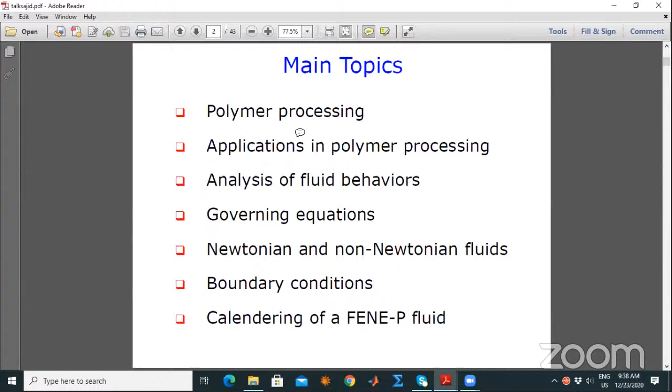First of all, polymer processing is defined as the engineering activity concerned with operations carried out on polymeric materials or systems to increase their utility. Industries associated with polymeric materials are either concerned with production of polymers from raw material, or with physical conversion of polymeric material into a finished product.

Mathematical modeling plays a central role in the process development and design of such processes. There are several important polymer processing operations, such as wire coating, calendering, roll coating, spin coating, knife coating, die forming, and mold coating. So there are multiple procedures.

To explain to the audience, particularly the research students, I will briefly explain a hypothetical model of the different processes in the polymer industry - how one can make a sheet of the desired thickness, or formulate a plastic film, or coat a sheet.

Let us consider a flow sheet of a hypothetical process for making a plastic film. The first step is dissolution: the polymer in solid form is mixed with a solvent to form a liquid, and that liquid is then transported from one place to another through the process of pumping.

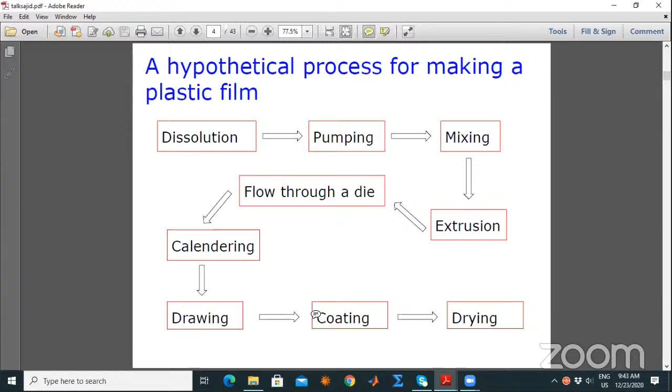On the basis of temperature variations, one can dry the film that is produced over a substrate. Not all these processes get into the mathematical model, because these processes are involved in the industry. But for mathematical modeling, we usually use the process of calendering, and we use mathematical models to describe the process of coating. So there are two main processes related to mathematical models, and those are calendering and coating. I will be briefly explaining a few of them in the coming slides.

This mechanism is commonly used in the paper, plastic, rubber, and steel industries.

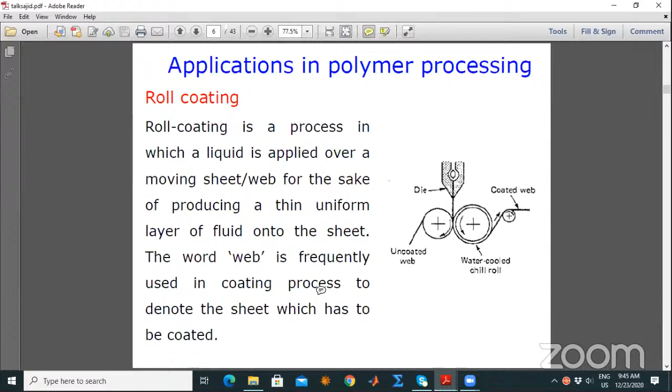Then there is another process known as roll coating. Roll coating is a process in which a liquid is applied over a moving sheet or web to produce a thin, uniform layer of fluid onto the sheet. For example, you can see from this figure, this is an uncoated web, and this is the polymer solution that is coming, and we need to coat this sheet with this liquid. This is the second roll, which also plays a cooling or heating role, so that the liquid is coated onto the web, and the coated web is collected on this side. The word web is frequently used in coating processes to denote the sheet which has to be coated.

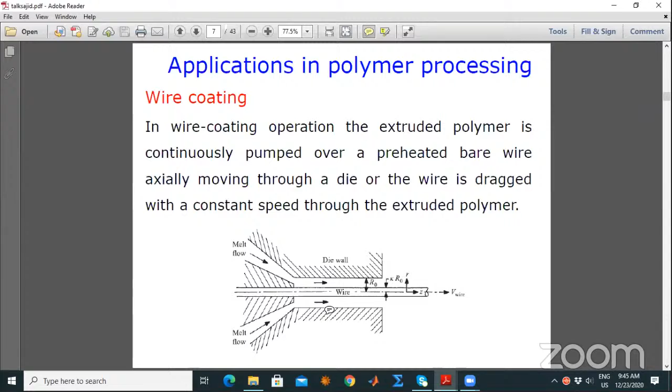Now, many of these explained steps refer to transport phenomena, the processes of momentum, heat, and mass transfer. Fluid dynamics is basically associated with momentum transfer, so this forces us to look at fluid flow models for such situations. As I've already explained, there are two main situations, the process of calendering and the process of coating, that are used to mathematically model through fluid mechanics equations. So any model in fluid mechanics can be based on the physical laws of conservation of mass, conservation of linear momentum, conservation of angular momentum, the first law of thermodynamics, and the second law of thermodynamics.

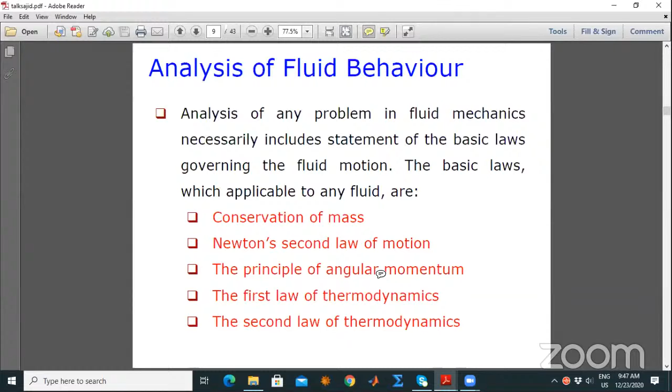Only these first two basic laws are necessary for a minimum level of study of any fluid problem: the conservation of mass and the conservation of momentum. If there are rotations involved in the system, then we need to add the angular momentum terms, and if there is heat transfer involved, then we need to also incorporate the first and second laws of thermodynamics. It is not necessary to use all these laws together, but there are some situations where we also need the additional features.

For example, if you have a situation in which the fluid is moving through a magnetic field, then we need to incorporate the Lorentz force into the momentum equation. And if the fluid is moving through a porous medium, then we have to incorporate the Darcy resistance. So there are additional features coming into the equations if we have additional restrictions on the problem.

Once we have developed a mathematical model in the form of partial differential equations, a question arises of how to simplify or solve this model. Many apparently simple problems in fluid mechanics cannot be solved analytically, and in such situations we must resort to more complicated numerical solutions and results of experimental tests.

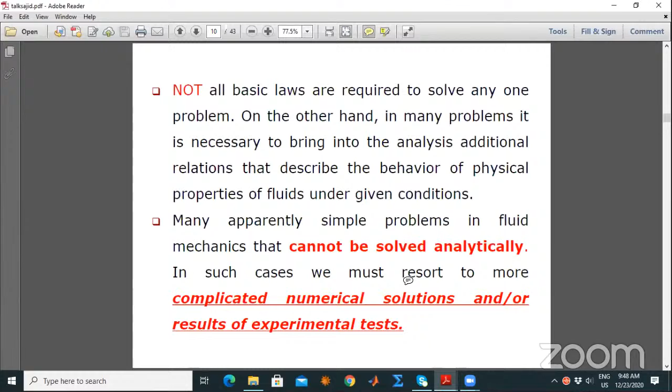To describe any fluid model, we need to have a constitutive relationship that relates the shear stress with the deformation rate for that particular fluid, or one near to it, which can predict the properties of that fluid. So we need to define which kind of constitutive relationship we are going to use to study our fluid model. The subject that deals with such situations is known as rheology, the study of relationships between stress and corresponding strain in a non-rigid substance.

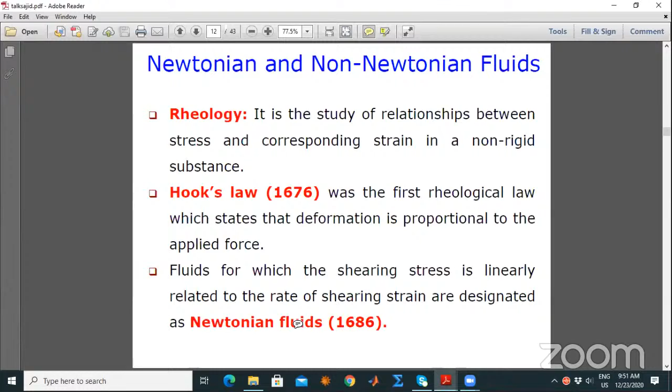The first rheological law was given by Hooke in 1676, stating that the deformation is proportional to the applied force, for solids. For fluids, the first such law was given by Newton: fluids for which the shearing stress is linearly related to the rate of shearing strain are designated as Newtonian fluids, and this model was given by Newton in 1686. Most common fluids such as water, air, and gasoline are Newtonian under normal conditions.

Maxwell in 1867 suggested that all substances, including gases, should possess both viscosity and elasticity in shear, and he quoted the example of glue. The glue exhibited a time-delayed partial recovery of deformation, and this was the first recorded observation of non-Newtonian behavior that deviates from Newton's law of viscosity.

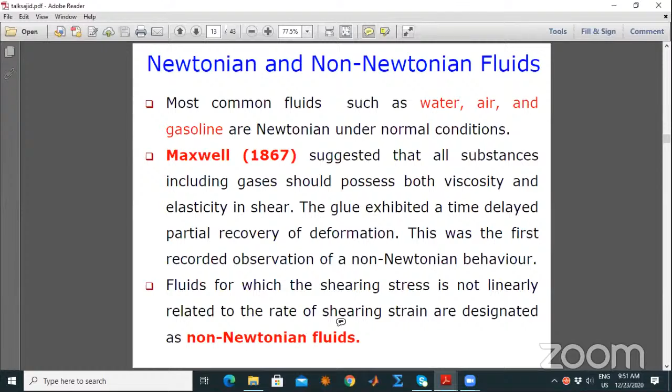Fluids for which the shearing stress is not linearly related to the rate of shearing strain are designated as non-Newtonian fluids. In the late 1920s, it became realized that there exist large variations in non-Newtonian behavior, and therefore one cannot describe all non-Newtonian liquids by a single constitutive relationship, because of the complex nature of such fluids.

So there exists a rheological classification. One can define different classes of such non-Newtonian fluids: the time-independent fluids, the thixotropic fluids, linear viscoelastic fluids, and non-linear viscoelastic fluids. These classifications exist for the non-Newtonian fluids.

I will briefly explain the time-independent fluids, which are further divided into three categories: the pseudoplastic, famously known as shear thinning fluids; the dilatant, or shear thickening fluids; and the viscoplastic fluids. Shear thinning means that when we increase the rate of shear, the viscosity decreases, and the opposite behavior is shear thickening, where increasing the shear increases the viscosity.

Viscoplastic is the behavior of the fluid in which the fluid needs a minimum amount of stress to be moved, which is known as the yield stress. For example, toothpaste and similar fluids fall in the category of viscoplastic fluids.

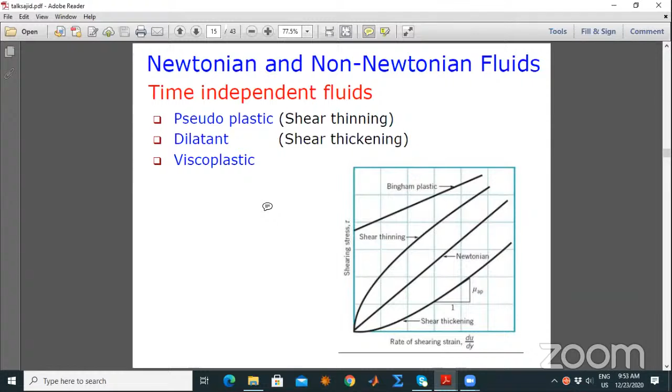Thixotropic fluids are those fluids whose present sheared internal structure is undergoing change for any reason. For example, gel that becomes thin on shearing, and viscosity decreases with time.

The opposite type of behavior, namely a build-up of structure under steady shearing motion, is known as rheopexy or anti-thixotropy. In this case, structure builds up and viscosity increases with time, and fluids even solidify in some cases.

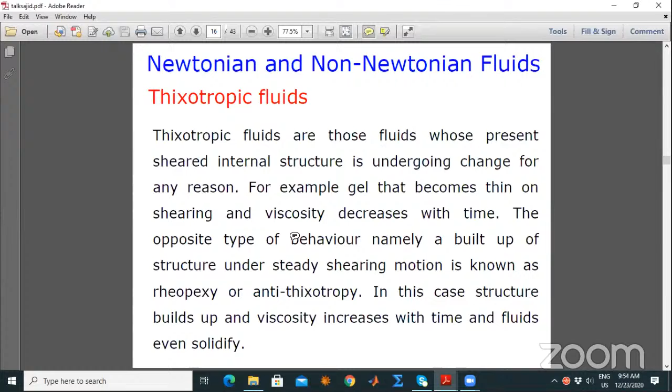The other very important class of non-Newtonian fluids is known as viscoelastic fluids, and there are two models related to viscoelastic fluids: the linear model and the non-linear model. This is a type which possesses both appreciable elasticity of shape and also viscous properties.

In oscillatory shearing motion, elasticity produces a lag between the shear rate and stress. This phenomenon occurs when the applied shear stress is small or slow.

For the nonlinear case, if the shear is large enough, then the strong elastic liquids show normal stress effects, and the normal stresses on the face of an elemental cube are no longer equal. So in different directions, the normal stress effects are different.

Another important class of non-Newtonian fluids is the generalized Newtonian fluid, which is based on experimental data. People have predicted some fluid models on the basis of empirical results based on experimental data.

In such cases, the important phenomenon in the generalized Newtonian fluid is that the shear stress is a function of shear rate at a particular time, but not dependent upon the history of the deformation, meaning the previous state of deformation does not affect the present state of deformation.

The constitutive equation for such fluids is the generalized form of the Newtonian fluid. The power law and the Carreau cross fluid are examples of such fluids.

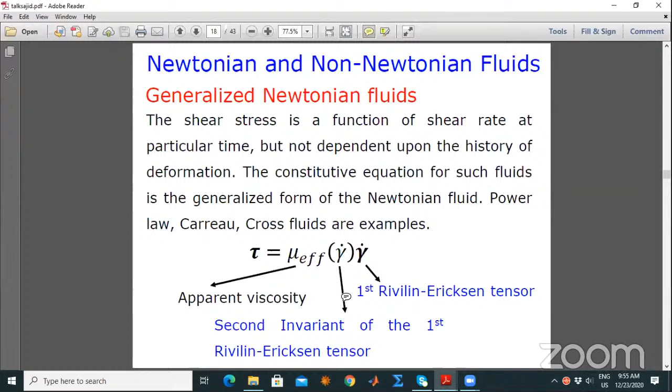The other class is the differential type fluids. As already mentioned, in the generalized Newtonian case the current state of deformation does not depend on the history of deformation, but in the differential type fluid, the current state of deformation depends on the history of the deformation.

So for a short part, the recent memory is very important in such fluids. More specifically, stress is a function of the velocity gradient and some number of its higher derivatives. These materials lack a gradually fading memory.

Instead, their memory fades precipitously, meaning it fades suddenly. Further, they do not exhibit stress relaxation in a creeping flow. Second grade, third grade, and fourth grade fluid models are examples of differential type fluids.

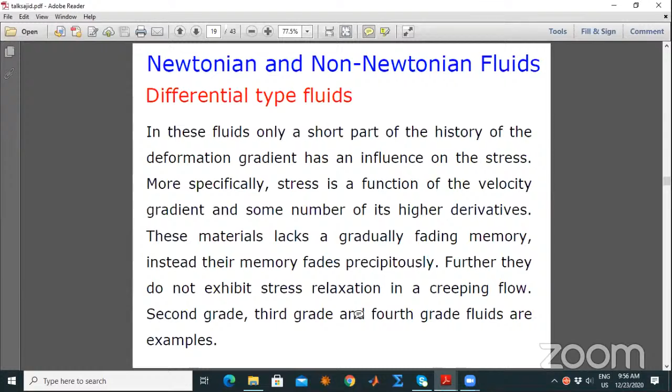Another important class of non-Newtonian fluids is the rate type fluids. This is because of Maxwell, who put forward a mathematical model in 1867 that describes the elastic and viscous behavior of gases. He recognized the notion of stress relaxation and introduced the concept of relaxation time.

Oldroyd was first to develop the rheological framework for rate type fluids. The important thing is that in differential type fluids, stress is explicitly given in terms of velocity gradients and its higher derivatives. However, in rate type fluids, this relation is implicit, and sometimes it is difficult.

We need not only to solve the fundamental equations, but also to solve the partial differential equations that describe the constitutive relationship. Once we have the fundamental equation and the constitutive relationship in hand, then we need to impose the physical boundary conditions based on the interaction of the fluid either with the solid interface or with the fluid interface.

So when dealing with the fluid-solid interface, we have to incorporate in some cases the no-slip boundary condition, the slip boundary condition, or the generalized slip boundary condition. I'm not going into the detail of these boundary conditions.

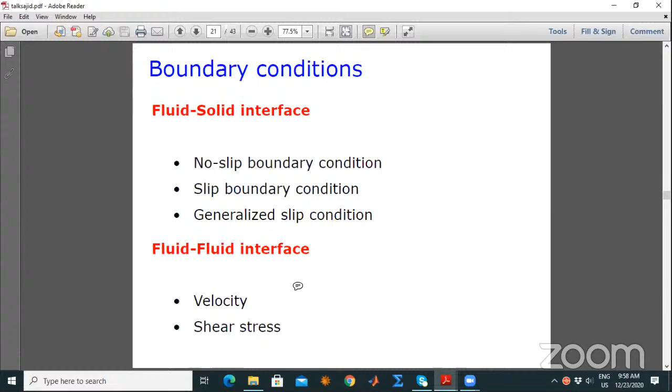And if we are dealing with the fluid interface, we need to stress the continuity of the velocity and the shear stress at the fluid interface. Now, coming to the particular example of the process of calendering of a FENE-P fluid, first I will describe the fundamental equations that are necessary for solving this.

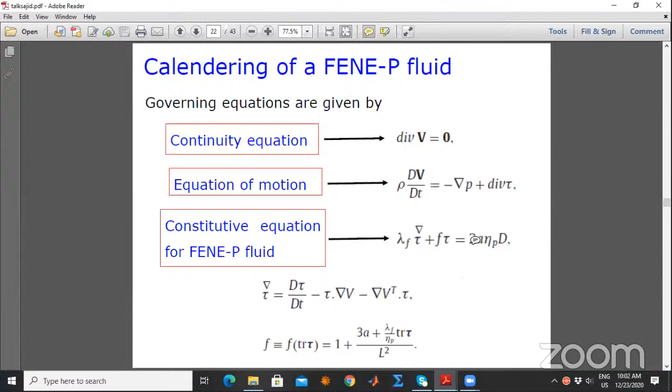So now you can see that this is an implicit relation, and we need to solve these. There are two unknowns u and v, and a third unknown which is the pressure P. Then there are three unknowns tau xx, tau xy, and tau yy. So there are 6 unknowns and 6 partial differential equations to solve. This is a difficult system to be solved in its present form.

So we utilize the condition that the gap between the two rolls is much smaller than the radius of the roll. By incorporating this condition, which is a physical condition in this case, famously known as the lubrication approximation theory in fluid mechanics.

We assume a creeping flow, because in such situations where the polymer is moving, the flow moves very slowly, and in such cases the inertial part can be neglected. So we have neglected the inertial part, and we further assume that v is much less than u, and that partial derivatives in the direction of x are much smaller than the partial derivatives in the direction of y. These are all assumptions of the lubrication theory.

Once we utilize these assumptions into these equations, they considerably simplify for us, and we get that the pressure is not a function of y in this case. We can now easily solve this equation by integrating it, and we can determine the tau xy component from here.

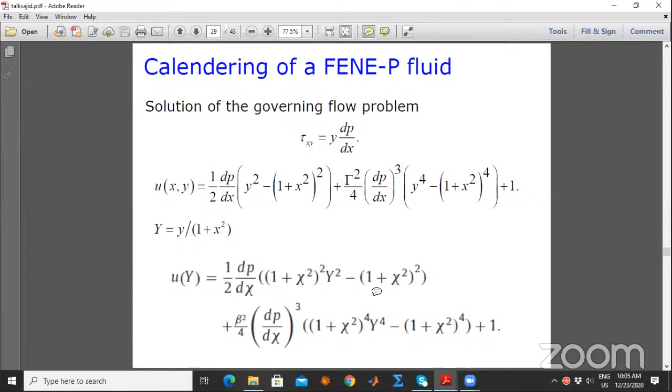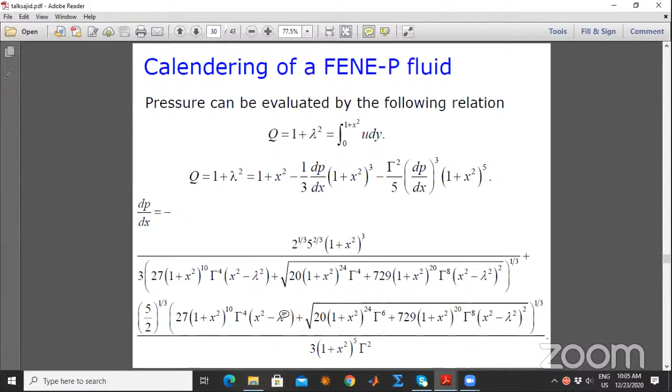On the basis of this velocity, because in these situations pressure is not known to us, but the flow rate of the situation is given to us, that the fluid is moving with this rate. So by utilizing the formula for the flow rate, because this flow rate is known to us, we can find the flow rate and we can find the pressure gradient from here. And by integrating this pressure gradient, we can find out the value of the pressure.

We can find out the quantities of engineering interest, like the roll separating force, that is, when the fluid is leaving the rolls, what is the force on it. Then we can also find out the power transmitted on the roll. We can also find out the shear viscosity, and we can also find out the first normal stress coefficient. So these are the expressions for finding these values.

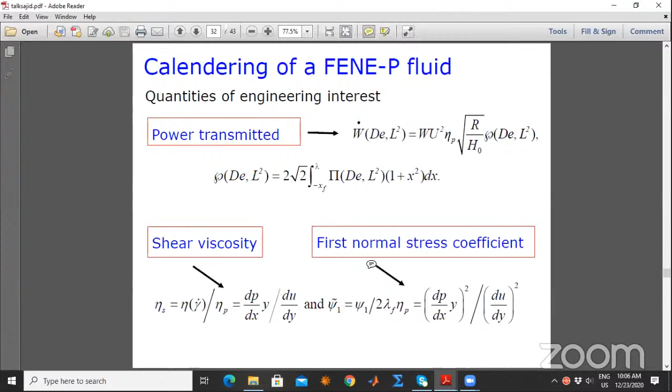And we have some key findings related to this study. I have not explained in detail the mathematics, because it's somehow a complicated model and you need to solve it. The key findings of the present study are basically that the pressure inside the calender decreases by increasing the viscoelasticity of the fluid. Then the thickness of the exiting sheet is less for viscoelastic fluids up to a specific value of entering sheet thickness, and then it increases.

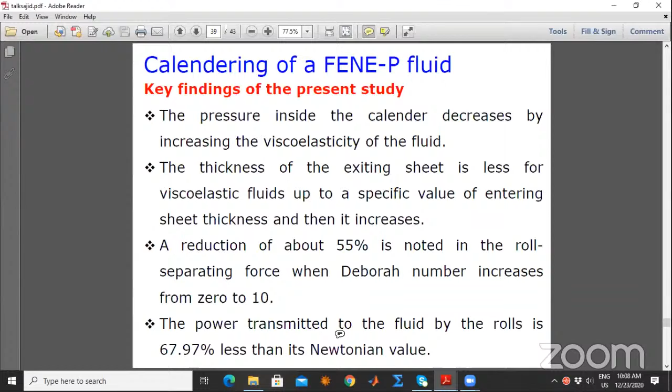Because we are comparing our results with the theoretical model of the Newtonian fluid that already exists in the book of Stanley Middleman on the fundamentals of polymer processing, we observed that a reduction of about 55% is noted in the roll separating force when the Deborah number increases from 0 to 10, and the power transmitted to the fluid by the rolls is roughly 68% less than its Newtonian value. And these results are already published in the Journal of Non-Newtonian Fluid Mechanics.

And if someone is interested in the details of the calculation, one can also go through this research publication. And we are hopeful that the solution presented here provides a solid benchmark for the computational modeling of the more sophisticated two-dimensional calendering problems.

I also like to explain that I was associated as adjunct faculty in NUST as well, in 2016, and I supervised two MPhil students. One of them worked on such kind of problem, and we investigated a flow problem of some authors from Sweden, and we pointed out some corrections in their model.

We pointed out corrections in their model to the authors, and they corrected it, and they acknowledged the efforts of this, and they also acknowledged the School of Natural Sciences, National University of Sciences and Technology, because the student Hira Siddiq was an MPhil student over there in the department. I was supervising her case, and she also published a paper with the School of Natural Sciences address in another fluid model.

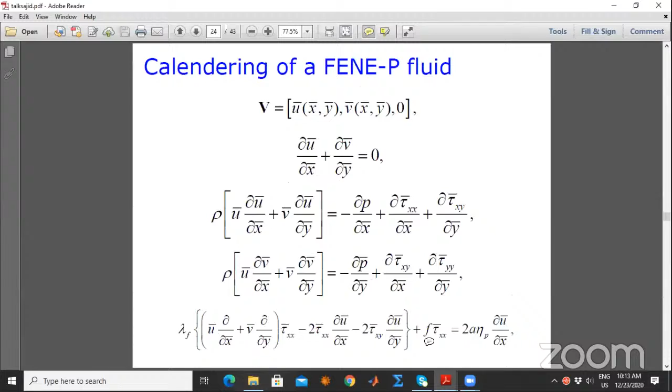Okay sir, one quick question related to my previous question. If you can please show us page 23 of your PDF. Okay, fine. Yes, please.

And looking at the boundary conditions on page 27, if you can go please. So, yeah, we have U is equal to capital U, U bar is equal to capital U at Y equals H of X bar. So I was wondering that one should have this radius multiplied with capital U, in case we are saying it is the angular velocity. If it is tangential velocity, it is okay.

So basically the answer lies in the previous discussion as well, because the mathematical model is for the narrow gap, and in that situation the curvature is negligible, so one can utilize the capital U velocity as compared with U. But your point is very valid, and I will look into the possibility of putting R into the mathematical model and see what effects appear, because I have not yet seen it. I will take your point very seriously, and we can develop a mathematical model incorporating the radius R into the equation, and then I can say something about whether we get a different scenario or similar results to what we have already got.

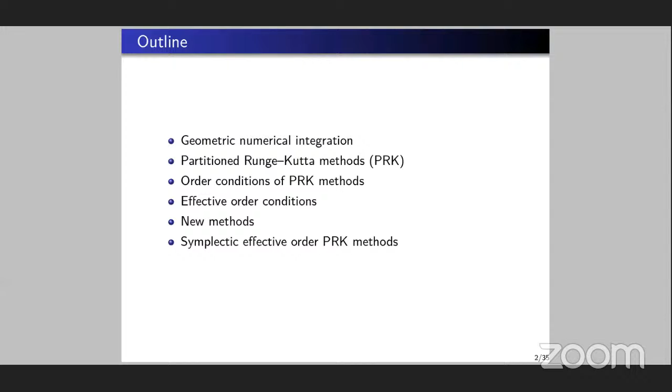Geometric numerical integration is a branch of numerical analysis concerned with the preservation of geometric and physical properties of a differential equation after discretization. By this I mean, if you have a differential equation with certain conserved quantities, we want these conserved quantities to be preserved numerically as well. That means conservation of energy, conservation of momentum, are preserved analytically, but we want to make sure that our numerical method preserves the energy, momentum, phase space, or symmetry of the differential equation numerically as well. This branch is known as geometric numerical integration.

So for the Hamiltonian system, we have symplectic methods. For reversible systems, we have symmetric methods. For differential equations on manifolds, we have Lie group integrators. And for integral preserving equations, we have the discrete gradient method.

What are conservative differential equations? Well, the concept is the first integral. So if we are given a differential equation y' = f(y), then a function h(y) is the first integral if it satisfies the equation such that the gradient of h multiplied by the right hand side of the differential equation yields a zero answer.

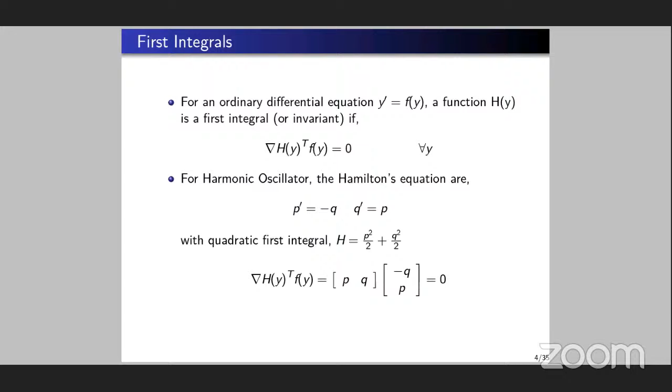What is our aim? Our aim is to numerically solve this differential equation with initial condition, and we will obtain discrete solutions. Obviously, it's a discretization, so we will not get the continuous solution - we will get discrete solutions y0, y1, y2, y3, up to yn, whatever n is. We want to make sure our energy remains constant, meaning h evaluated at the initial point equals h evaluated at all points, so the error between them should be 0. That means the energy is conserved numerically as well.

For this purpose, in this talk I will talk about symplectic Runge-Kutta methods, because they approximately preserve the quadratic first integrals of Hamiltonian systems.

What we are trying to do is construct symplectic Runge-Kutta methods from the definition, apply these methods on the Hamiltonian system, verify their order, and then verify the conservation of energy as well.

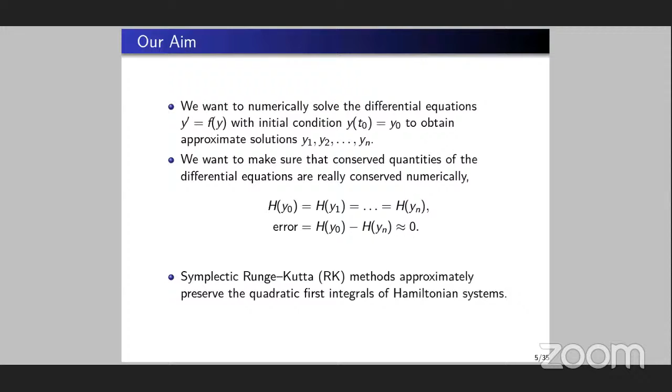We are interested in a separable Hamiltonian system, and this is the equation of a separable Hamiltonian system. This work can be extended to non-separable Hamiltonian systems as well. The equation is separable in the sense that P dash depends only on Q on the right hand side, and Q dash depends only on P.

What we are trying to do is solve this separable system using partitioned Runge-Kutta methods. By partition Runge-Kutta methods, I mean I will solve one differential equation, P dash, using one Runge-Kutta method, given as the stages and the output value. Capital Pi are the stages, and Pn plus 1 and Pn are the input-output values of this Runge-Kutta method, which solves the differential equation P dash equals f of Q.

The second differential equation is Q dash equals G of P. This is the separable second differential equation, and we solve it using another Runge-Kutta method, with stages Qi and output value Qn plus 1 with input value Qn. We have the matrix Aij - this is the Runge-Kutta method for one, and the Bi are the quadrature weights for this method, while A tilde and B tilde are the parameters for the other Runge-Kutta method.

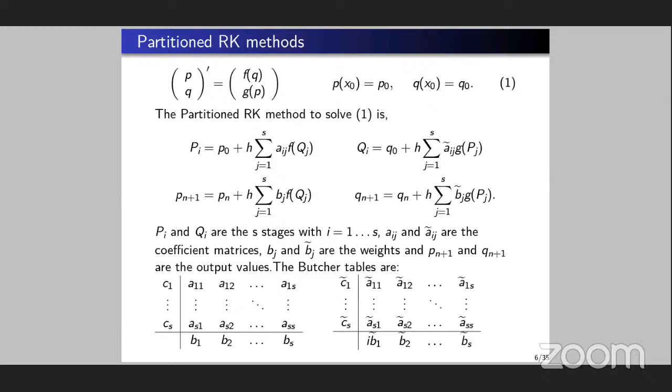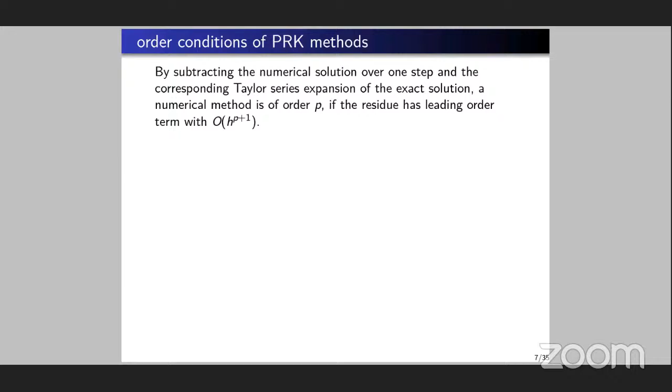Order conditions. When we want to find the order of a numerical method, what we normally do in numerical analysis is compare the numerical solution with the Taylor series of the exact solution. That is the rule to find the order of a particular numerical method.

So if I have the numerical method Pn plus 1 and Qn plus 1 - since Pn plus 1 is just one Runge-Kutta method and Qn plus 1 is the second Runge-Kutta method - and the Taylor series of the exact solution is y of xn plus h equals y xn plus h y dash of xn, we compare them, the numerical values and the exact solution, and we will get order conditions.

I think all of you are familiar with the Runge-Kutta method of order 4 and order 5, the classical explicit methods. They have 1/6 in the coefficients - 1/6, 1/3, 1/3, and 1/6. So if you just add them together, they become equal to 1.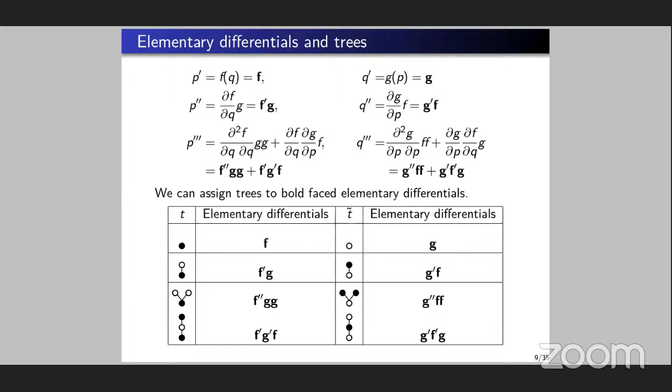We can also relate the Runge-Kutta method coefficients with the trees as well. So these were the 4 order conditions of order 2. The first 2 are for the order 1 condition, and the other 2 are order 2 conditions. We can say that a black vertex is BI, and a white vertex is BI tilde. Remember, we have 2 Runge-Kutta methods, one with the BI and one with the BI tilde.

If there's just one connection, black to white, we have BI CI, but CI is a white vertex, so it's CI tilde actually. And similarly, the last one, BI tilde, AIJ, CJ tilde. So BI tilde is the white vertex, AIJ is the connecting black vertex, and CJ tilde is the white vertex. So it's a tall tree at the bottom of this page.

So basically what we have done is related the trees with the derivatives of a differential equation, and related the trees with the coefficients of the Runge-Kutta method as well. In literature, this graph theory has been used extensively - you can relate integration with the edges, and derivatives with the edges, and relate differential equations with graphs and integral equations with graphs as well, and a lot of people are working on it.

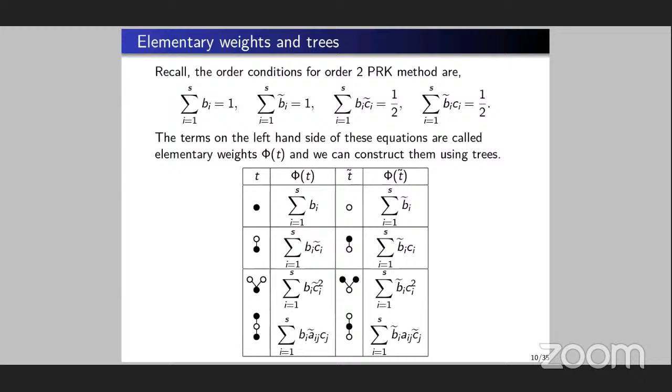These are known as elementary weights: summation bi, summation bi tilde, bi ci, and very beautifully it's 1 over the density of that particular tree. So you can see this thing, these are the 4 order conditions we have seen.

If it is just one vertex, bi is equal to 1 over 1, which is fine. Then bi ci tilde equals 1 over the gamma of this tree, and the gamma of the tree is 2. The third one has gamma 3, and the last one has 6 because it's 3 vertices. We assign 3 to the root, then remove the root, leaving 2 vertices, so 3 into 2 into 1 is 6.

So we can relate the trees, and now we don't need the Taylor series. We just need the trees to construct our order conditions. We consider higher order trees, define our order conditions, solve them, and get the Runge-Kutta methods. These are order conditions for tilde trees, and these are order conditions for non-tilde trees.

Now the concept of effective order. For Runge-Kutta method of order 1, we require 1 stage. For order 2, we require 2 stages. For order 3, we require 3 stages. For order 4, known as the classical Runge-Kutta method, we require 4 stages. For order 5, we require 6 stages. So as the order increases, the number of stages increases.

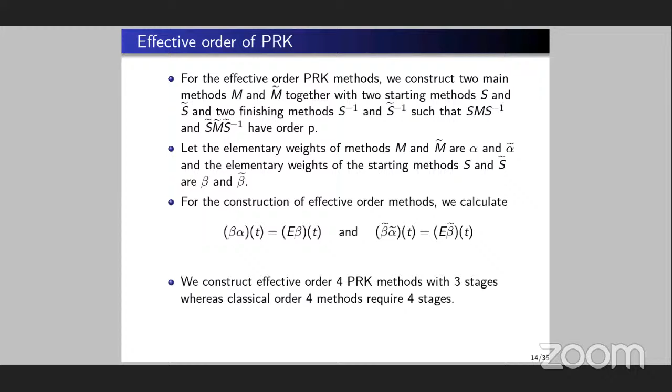And how have we done it? The most obvious feature of these methods is efficiency in terms of implementation cost.

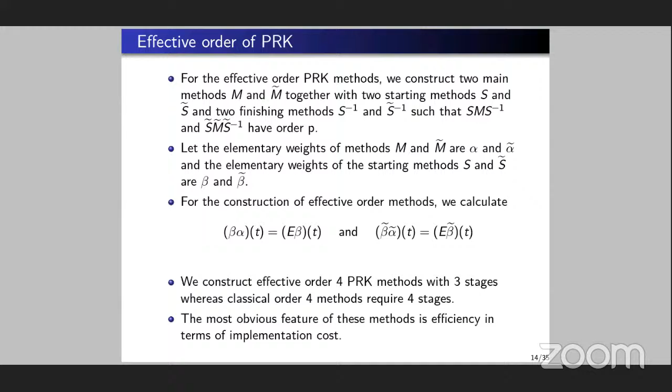Okay, so because we are doing composition, we have to define the composition. And basically what matters here is that we have to make sure that Runge-Kutta methods form a group. So now it's the relationship of numerical analysis with group theory. If Runge-Kutta methods form a group, it has to be closed - that's the first thing.

So this means that if I take 2 Runge-Kutta methods and compose them together, then I get another Runge-Kutta method. The answer should be another Runge-Kutta method. So I take the first Runge-Kutta method, I calculate from y0 to y1 as one step, and then y1 to y2 is another Runge-Kutta method. I can combine them, and it's a big Runge-Kutta method, going from y0 to y2 directly.

And the Butcher table for this one is this. So it's just small a's, capital A's on the diagonal, on the off-diagonals are zero, then matrix B, and then the left-hand side C's are the quadrature nodes, and we can obtain them using the consistency condition.

It's very straightforward. The sum of the rows should be C1, and these C1s are the points where we evaluate the stages. Then B1, B2 are the weights of one Runge-Kutta method, and B1 tilde and capital B1, capital B2 are the weights of the other Runge-Kutta methods.

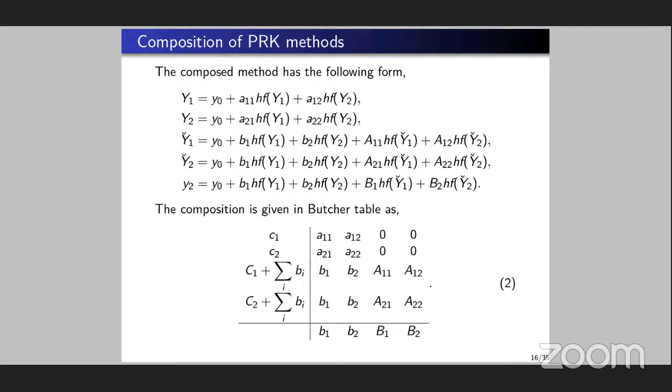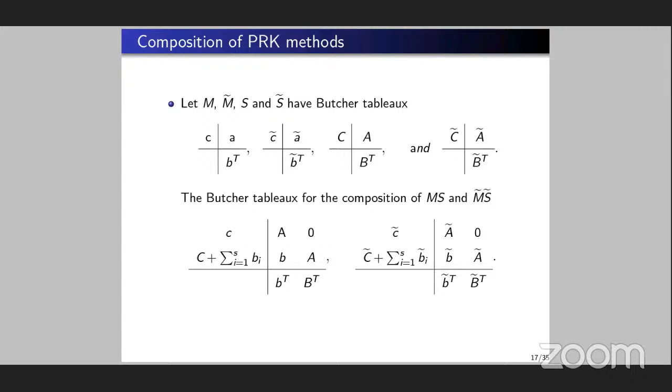Okay, so we have composition in the partition sense. It's also well defined. Diagonals are A's and off-diagonals are 0 and B tilde, and then the consistency condition.

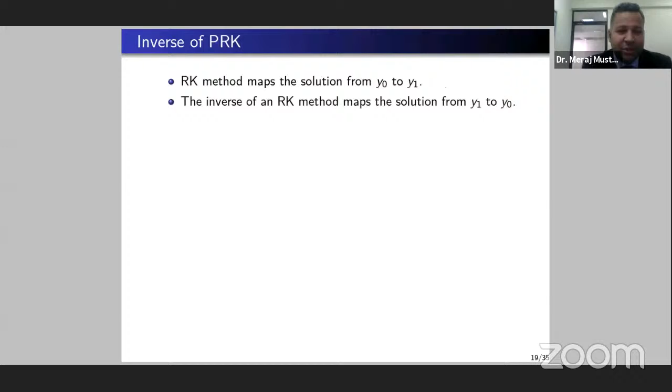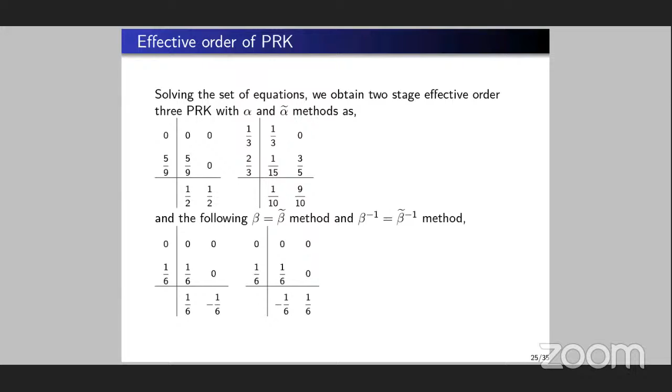Okay, no worries. We define the inverse as well, and the inverse is also well defined. Basically, we solve these order conditions - these are the effective order conditions. If we solve them, we obtain these effective order partitioned methods. These are the order 3 methods with just 2 stages. Then we have effective order 4 partition methods with 3 stages, and this is a very good achievement.

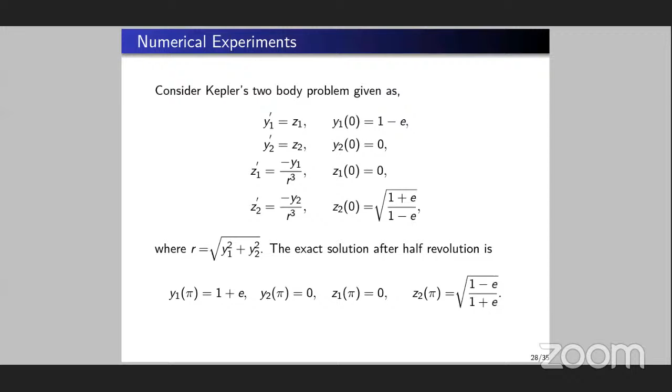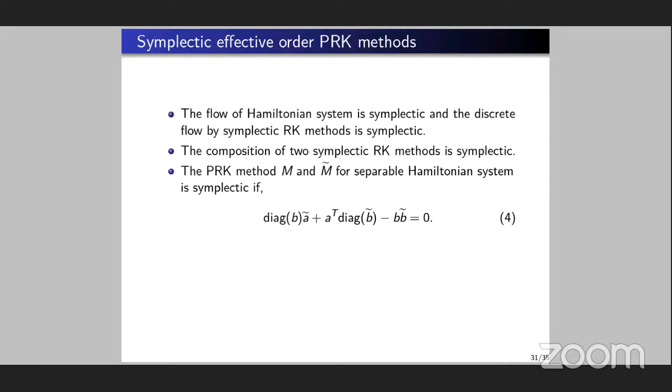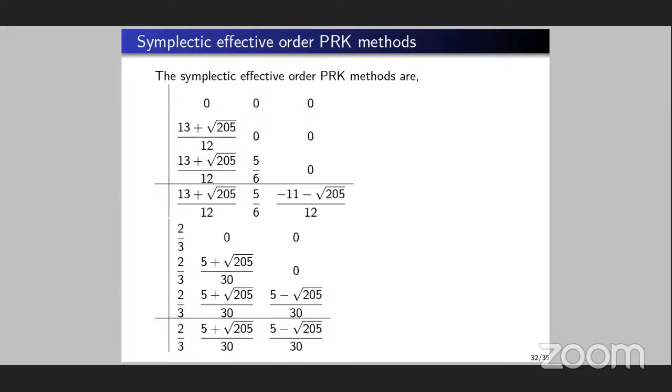We solve them and get effective order symplectic partitioned Runge-Kutta methods. These are order 4 methods with just 3 stages. These are the starting methods, and these are the main methods. And we apply these methods. This is my last slide.

This shows that if we apply the symplectic method to solve a Hamiltonian system, we get conservation of energy. We have also done the number of function evaluation details, but that's not part of this talk. The number of function evaluations verifies that our computational cost is also less compared to the standard classical methods.

This has been published, and there are several papers related to this one. This has been published as well. With this, thank you very much for your time and for listening.

Any questions? Any question from the audience, please? Is there any question from the participants? So I guess there's no hand raised.

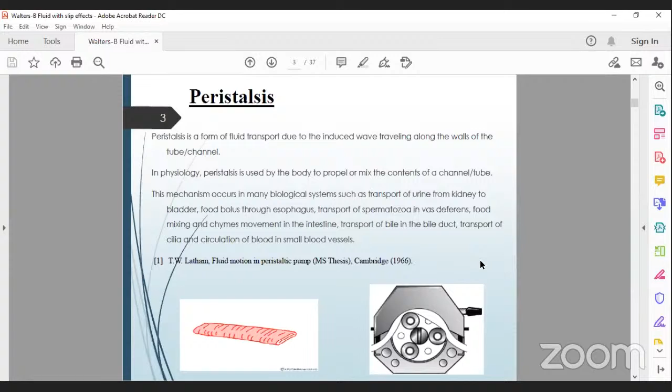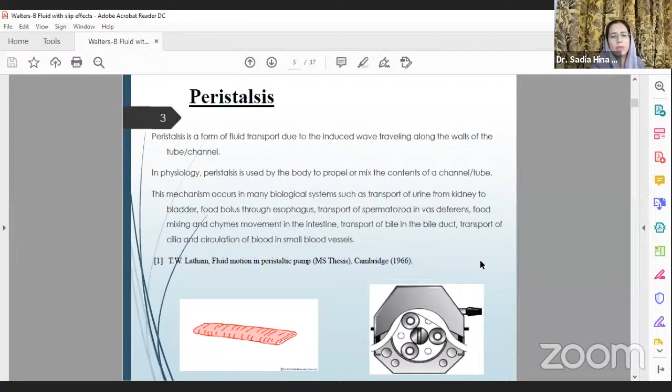Peristalsis is the form of fluid transport due to a wave traveling along the walls of a tube. It is basically the contraction of smooth muscles to propel contents through the digestive tract, and occurs in many biological processes like transport of urine from kidney to bladder, transport of food bolus through the esophagus, and transport of blood in small blood vessels. This phenomenon also occurs in many industrial applications, like pumping different fluids, including toxic fluids, in industry. This phenomenon was first discussed by Latham in 1966 in his MS thesis. The main discussion is the Walters-B fluid in peristalsis, as different fluids appear.

Sorry for the interruption, but can you please fix your mic a little bit? There is a little distortion from your end.

Walters-B fluid is a class of viscoelastic fluids, a subclass of non-Newtonian fluids already explained in detail by our colleague Dr. Sajid. Walters B fluid describes both elasticity and viscous effects, like nylon, jelly, paints, and many biological fluids like blood, which is also considered a viscoelastic fluid.

Walters B fluid was first introduced by Walters in 1964, and many authors have done a lot of research about Walters B fluid by considering many industrial problems as well as in peristalsis.

Then I have considered the slip condition. We consider slip condition because at the boundary, the fluid and the wall do not have the same velocity. So we consider the velocity of the fluid is not directly proportional to the velocity of the wall, but the difference between fluid velocity and wall velocity is proportional to the shear stress. That is the slip condition.

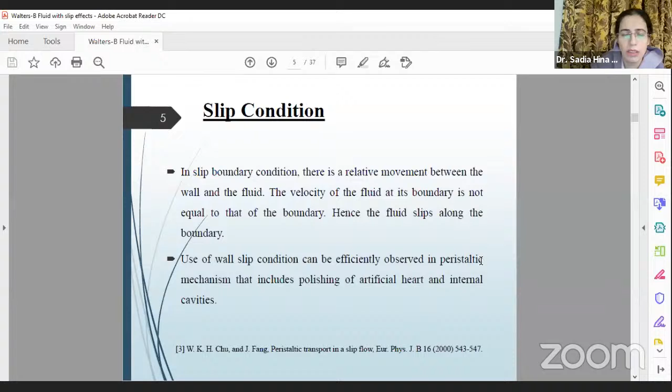Then we have considered heat and mass transfer effects in the present study. Heat transfer is the transfer of heat from a high temperature region to a low temperature region, and it has a lot of applications like conduction in tissues, heat convection due to blood flow through the pores of tissues, and radiation between surface and environment. This phenomena occurs in blood flow, hemodialysis, and the oxygenation process.

Mass transfer effect is the transfer of mass from a high concentration region to a lower concentration region. This occurs in filtration, drying, evaporation, etc. Peristalsis with heat and mass transfer effects is very important in medical operations like mass transport in the blood oxygenation process and hemodialysis. Heat transfer in peristalsis was first discussed by Radhakrishnamacharya and Srinivasulu in 2007.

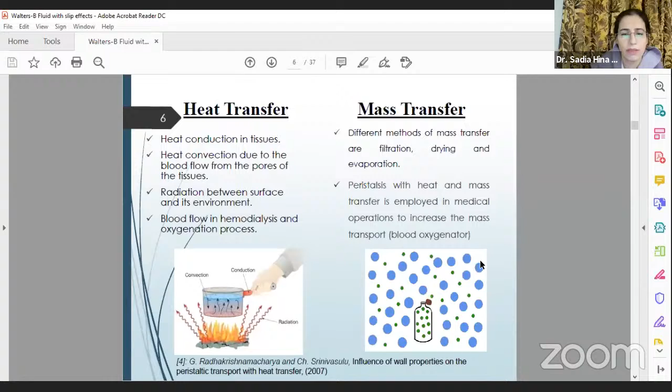Using all the above mentioned things, we have formulated the problem considering the incompressible fluid, viscoelastic Walters B fluid with slip conditions, and peristaltic motion due to sinusoidal waves traveling along the walls, along with heat and mass transfer effects.

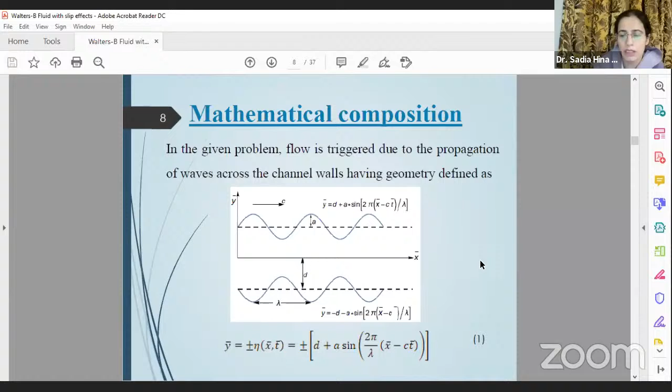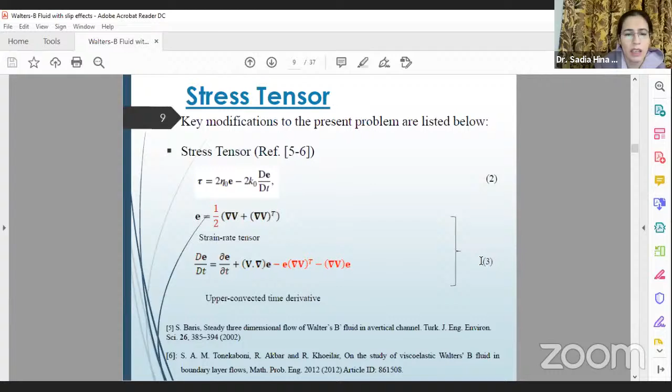These are the governing equations of the problem. The first main equation considered in fluid mechanics is the continuity equation, then the momentum equation. Equations 5 and 6 are the x and y components of the momentum equation, considering a two-directional flow, where u is the velocity along the axial direction and v is the velocity in the transverse direction, both depending on x, y, and t. Equation 7 is the energy equation, which involves the viscous dissipation effect described in equation 8. Equation 9 represents the concentration equation, as we have considered the mass transfer effect as well.

Here, concentration mass flux is also generated from the temperature gradient, represented in equation 9. The last term represents that the concentration mass flux is generated due to the temperature gradient, which is the Soret effect, considered in equation 9.

These are the stress components derived from the constitutive equations mentioned in equations 2 and 3: Sxx, Sxy, and Syy. These are the required stress tensors which we will use in our momentum equations.

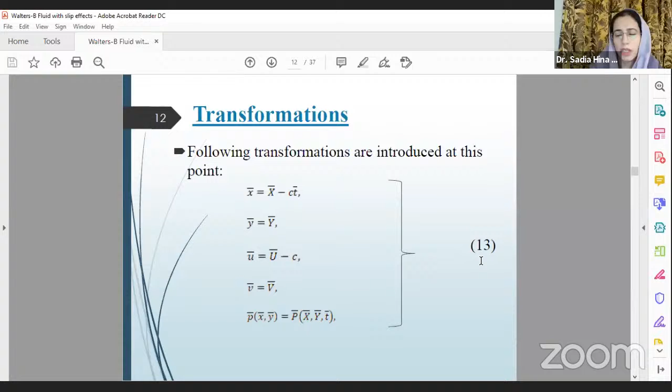The problem is in the laboratory frame, so I would like to transform it to the wave frame. That's why we have considered the transformation, and using it we transform our problem from the laboratory frame to the wave frame. After conversion, we are free from time derivative, and these are the equations after using the transformation.

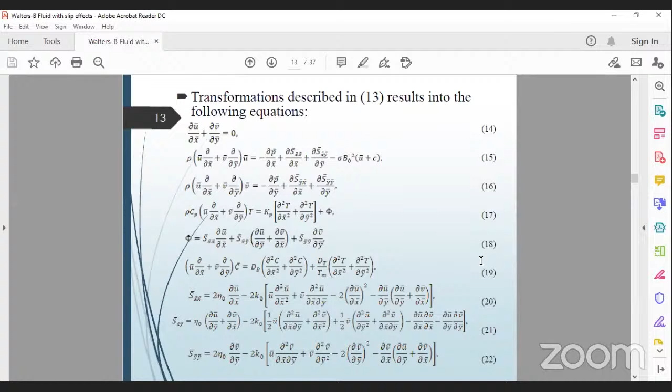These are the equations from 14 to 22, including stress components, viscous dissipation term, energy and concentration equations. These are in the form of wave, now defined in the wave frame.

Now we consider that the problem is highly nonlinear, so we would like to non-dimensionalize it first. For that we consider dimensionless quantities such as x, y, velocities, times, and so on.

After non-dimensionalization, the problem involves non-dimensional parameters described in the last two equations, like delta the wave number, epsilon the wave amplitude, Reynolds number, Eckert number, Schmidt number, Hartmann number, Brinkman number, etc. These are the parameters appearing in the non-dimensional equations.

These are the non-dimensional equations presented from 23 to 30, where 23 and 24 are the x and y components of the momentum equation after introduction of a stream function.

Equation 26 is the concentration viscous dissipation term, and 27 is the concentration equation. Here, by mistake, 25 is the energy equation - sorry for that. Equations 28 to 30 are the stress components.

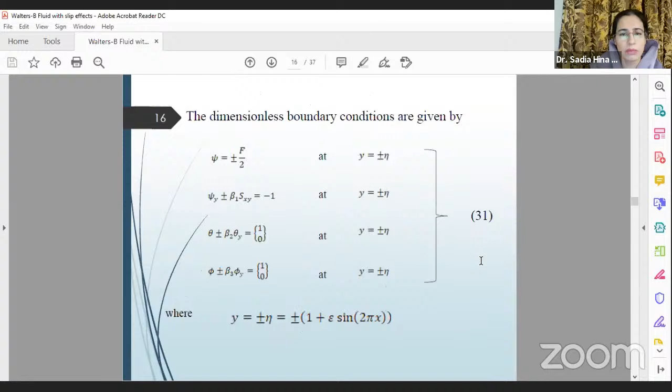So we are not applying that assumption. If we cannot apply that assumption, our problem remains highly nonlinear. So what do we do? We can solve it using a regular perturbation technique.

We have solved the problem by a regular perturbation technique about small wave number, since the wave number is very small - it is the ratio of channel width to wavelength, and the wavelength is very large, making the wave number very small. We considered the small perturbation, regular perturbation technique about small wave number.

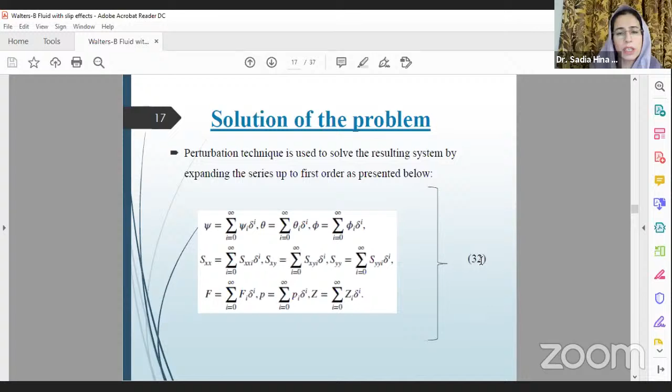By applying this regular perturbation technique, presented in equation 32, to our problem from equations 23 to 30, we compare the terms of delta to the power zero, giving the zeroth order system. We obtain the zeroth order system, which is in the form of an ODE, so we can solve it easily.

Then we get the solution equations of the first order system, by comparing the terms of delta power 1. These equations for the first order system are seen in equation 34, by comparing the coefficients of delta power 1. Here, the forcing terms contain a lot of psi-naught terms, so the equations are highly complicated.

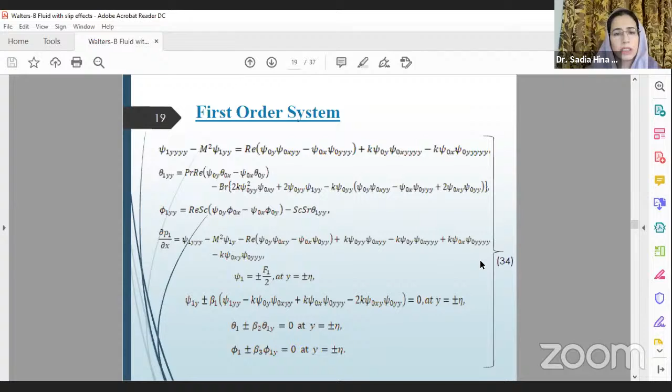We could use DSolve, but that was very complicated in Mathematica, so we solved them by hand.

After finding the solution of zeroth and first order solution, we combine the solutions and we obtain the stream function, velocity profiles, axial velocity, temperature, concentration, and heat transfer coefficients.

After that, we go for graphical results, to see how different parameters affect our velocity, temperature, concentrations, and heat transfer coefficient. So the behavior of different parameters can be observed through graphs.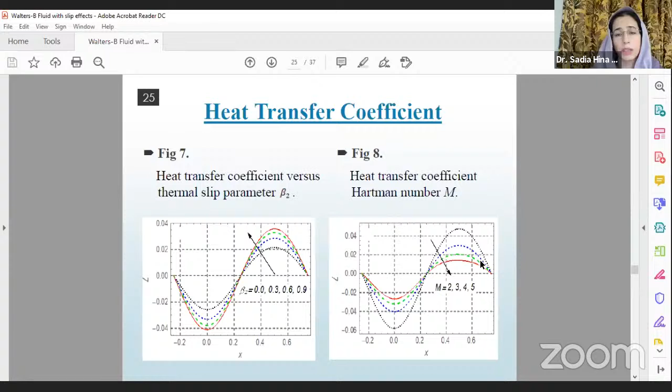These are the heat transfer coefficients, the graph of heat transfer coefficient, which is the rate of heat transfer. We can see that these are of oscillatory nature, and we observe the absolute value of heat transfer coefficient here. So the thermal slip parameter enhances the heat transfer coefficient, and the Hartmann number reduces it.

These are the streamlines. Basically, streamlines describe the flow pattern, where the wall shape is shown, and these are lines that describe the flow pattern.

But some lines split and form a circular shape, which is called the bolus. Most of the time we discuss the bolus size and trapping bolus, the number of boluses in the streamlines.

Here we can observe that the slip parameter reduces the size of the trapped bolus. As from figure A, we can see that the size of the trapped bolus is larger compared to figure C on the right-hand side, where the size of the trapped bolus is smaller. So here the slip parameter reduces the size of the trapped bolus.

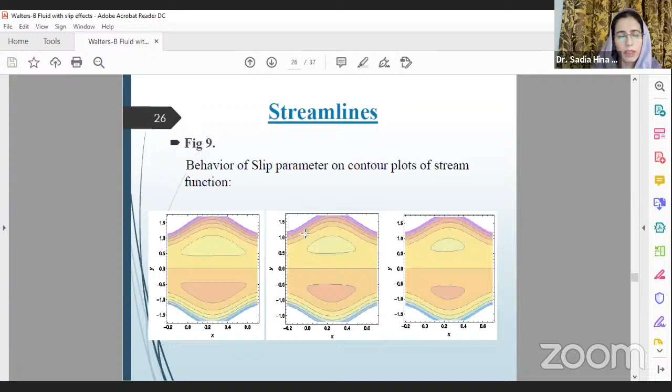These are the pressure rise results. This region represents the peristaltic pumping region, and this region represents the augmented pumping region. As discussed, pressure rise increases with the Hartmann number in peristaltic pumping, whereas it decreases in augmented pumping with the Hartmann number. Similarly, pressure rise decreases in peristaltic pumping and increases in augmented pumping with the beta 1 slip parameter.

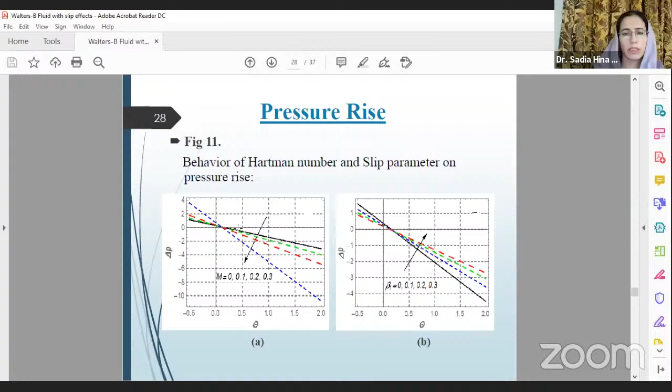At the end, I'll conclude my talk. We have considered this formulation, the Walters B problem, as its formulation was not correct when firstly discussed by different authors. So my main aim was to formulate the correct variant of the Walters B fluid model in peristalsis, and we have considered sinusoidal waves in a symmetric channel.

The main key observations are as follows: axial velocity increases with the viscoelastic fluid parameter as compared to the Newtonian fluid, and the profiles are parabolic, as we already discussed, since the flow is of Poiseuille type due to the pressure gradient. Temperature profiles are also parabolic in this study because of the presence of viscous dissipation effects.

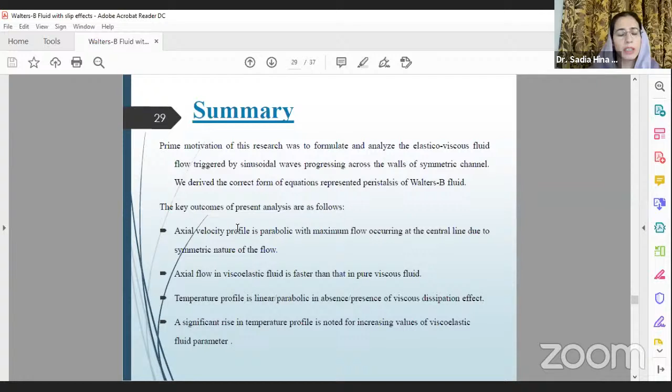And for pressure rise, we can see that the temperature rises by increasing the viscoelastic fluid parameter. This paper is published in the Arabian Journal for Science and Engineering. If anyone is interested, they can see it on Science Direct. Thank you.

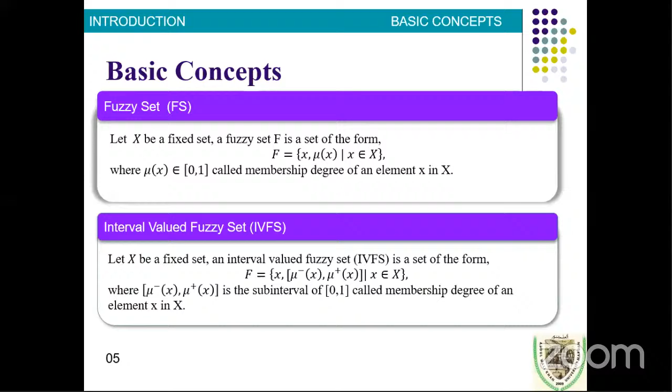Next definition is about hesitant fuzzy set. A hesitant fuzzy set can be defined as follows: let X be a fixed set, and the hesitant fuzzy set is defined where h of x shows the possible value in the closed interval 0 and 1.

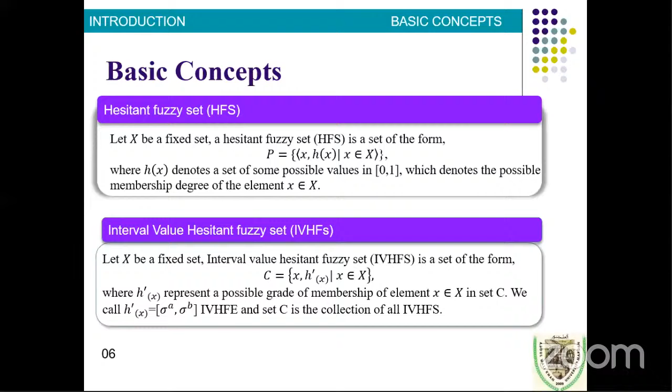Next is about interval value hesitant fuzzy set, represented by the equation where h dash of x shows the possible membership grading belonging to the closed interval 0 and 1. There are sub-intervals where sigma negative and sigma positive show the upper and lower values of the intervals, also called interval value hesitant fuzzy elements.

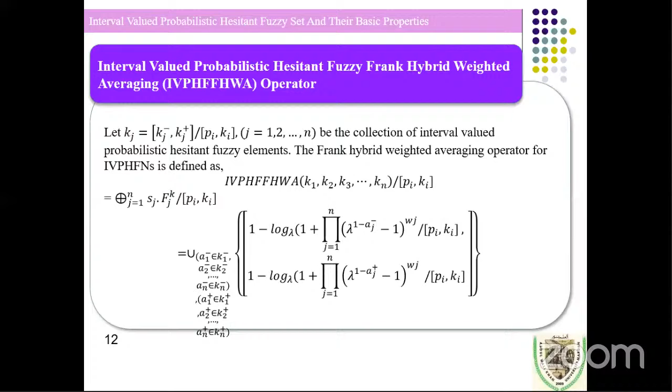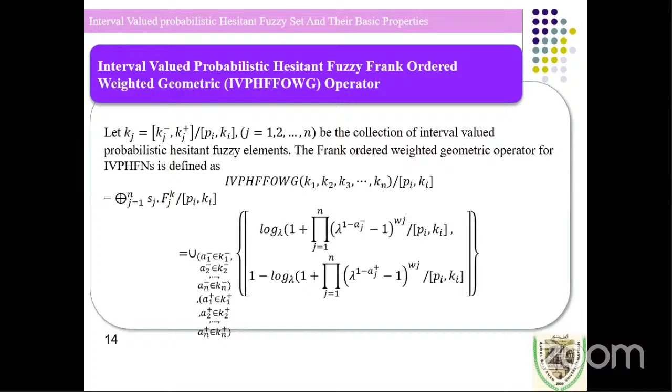Next is about the interval value probabilistic hesitant fuzzy Frank ordered weighted geometric operator. Let Kj be the collection of interval value probabilistic hesitant fuzzy elements. Then the Frank ordered weighted geometric operator can be represented as follows.

Next is about the multi-attribute decision-making approach based on the Frank operator. In this section, we have a collection of alternatives as well as weights, and the summation of weights must equal 1. Further, we have a collection of decision matrices containing the attributes as well as alternatives.

Next, we define our proposed methodology, which contains some steps. Step 1 is to transform the decision matrix into a normalized matrix. Step 2 is to use the proposed aggregation operator, the interval value probabilistic hesitant fuzzy Frank hybrid averaging or Frank weighted geometric operator, to aggregate the information. Step 3 is to find the score function of all aggregated matrices. Step 4 is to rank the aggregated alternatives according to the higher value of the score function. So this was our proposed methodology, which contains some steps.

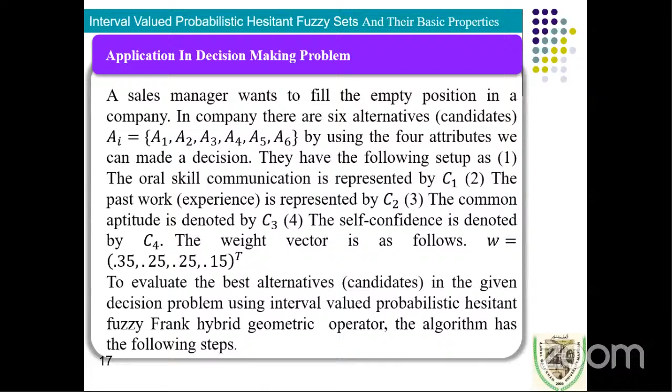This weight vector is represented as the equation 0.35, 0.25, and 0.15. Now we apply the proposed aggregation operator to evaluate the best alternative, and in this example we have to find the best candidate for this company. We have to apply the interval value probabilistic Hesitant fuzzy aggregation operator, which is covered in the next slides.

This was the data we have to draw for the selection of alternatives. This data type is interval value probabilistic Hesitant fuzzy sets. Now we have to implement or propose the aggregation operator.

Step one is about normalization. In this data there is no need of step one, because the data is already in normalized form. Step two is about applying the interval value probabilistic Hesitant fuzzy Frank hybrid geometric operator, along with the weight vector arguments, so we have to apply it.

Step three is to find the score value of the aggregated alternative, which is given as follows. The score function for alternative 1, alternative 2, and alternative 3 are given in this way.

So according to the score value, the ranking of the alternatives is as follows. According to the score value, we have ranked the alternatives, where A3 is best. From step 3, we have seen that the value of A3 is 0.314.

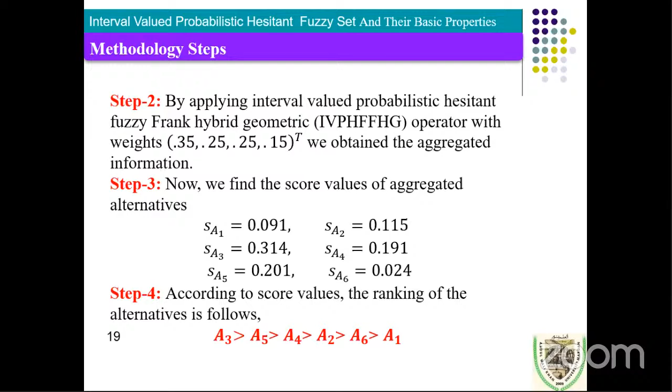Next is about comparison with other methods. Now we have to compare our method with existing methods. The above example is solved using the proposed aggregation operator, namely interval value probabilistic Hesitant fuzzy Frank hybrid geometric. Through this, we found that A3 is the best choice for the investment company.

Now, the comparison analysis is made with existing aggregation operators, which are Hesitant fuzzy Frank Hamacher aggregation, Hesitant fuzzy Einstein Hamacher aggregation operator, and Hesitant fuzzy Hamacher hybrid averaging operators, and we obtained the same best alternative. Hence we conclude that our proposed method is applicable and more reliable to tackle uncertainty in decision making problems.

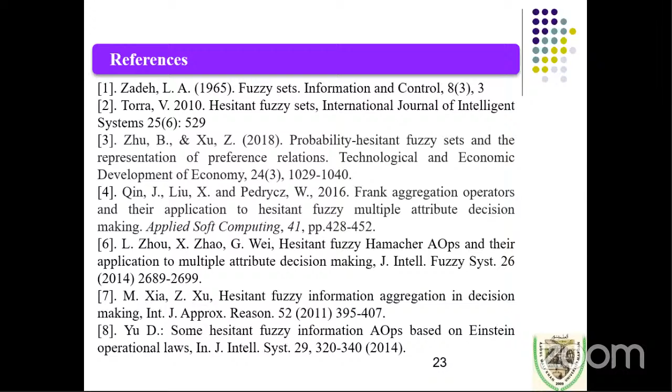The established aggregation operators, namely interval value Hesitant fuzzy Frank weighted averaging, order weighted averaging, and hybrid weighted averaging, as well as interval value probabilistic Hesitant fuzzy weighted geometric, order weighted, and hybrid weighted geometric aggregation operators were developed. Finally, there are some references, and thank you for listening to such a nice talk.